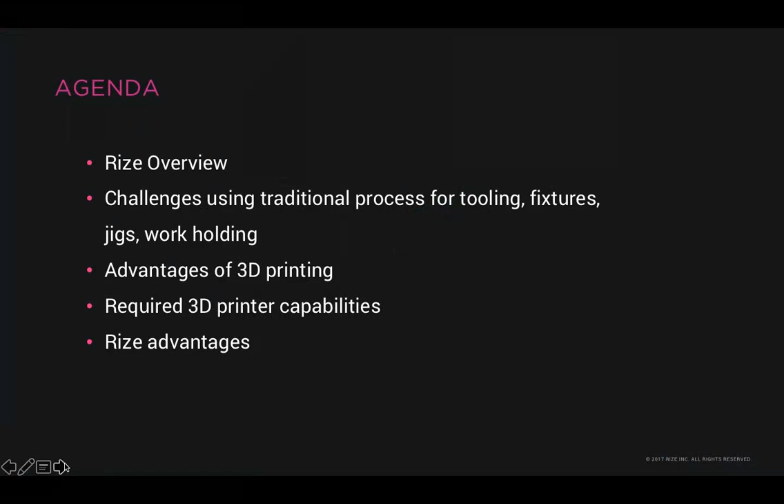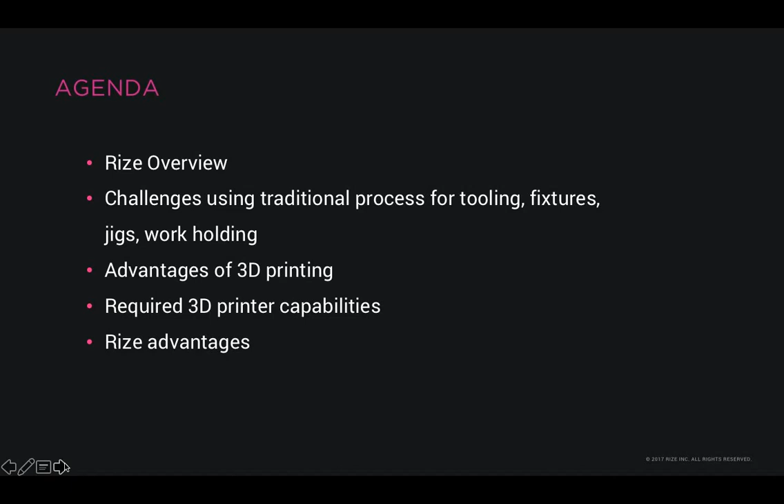First, I'll provide just a brief overview of who we are. Then we'll talk about some common challenges using traditional manufacturing processes to produce tooling. Next, we'll cover the advantages of 3D printing versus traditional processes for many of these applications. Some of you might already be using 3D printing, but this is useful information if you don't use a 3D printer or if you're thinking about implementing 3D printing but don't know that much about it. Then we'll talk about capabilities you need in a 3D printer if you plan to use it for on-demand production of functional parts in the tool room, on the production floor, or in your engineering office. I'll talk about some of Rize's advantages in this area.

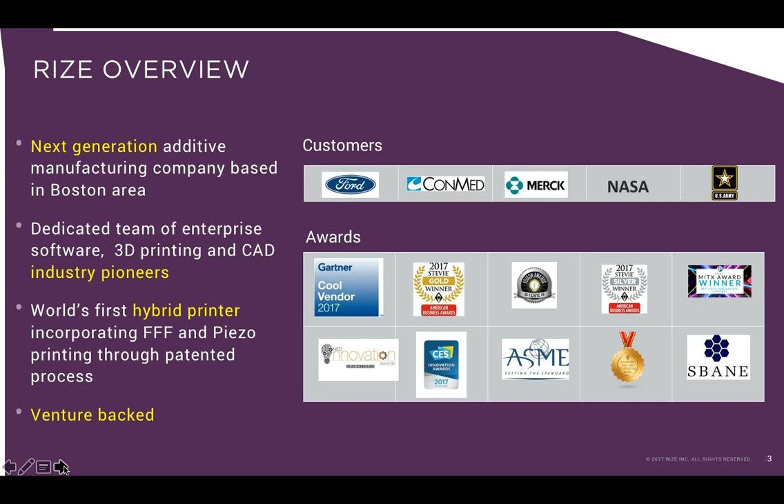First, let me tell you a bit about who we are. We're a 3D printer manufacturer just outside of Boston. Rize was founded by and has a team of 3D printing pioneers with more than 20 3D printing patents to our name, including our APD technology. Rize is venture-backed. Our mission is to enable sustainable and inclusive innovation to achieve additive at scale. This means getting the technology into the hands of more users throughout the enterprise and to an entirely new segment of commercial users who haven't previously used 3D printing or additive manufacturing.

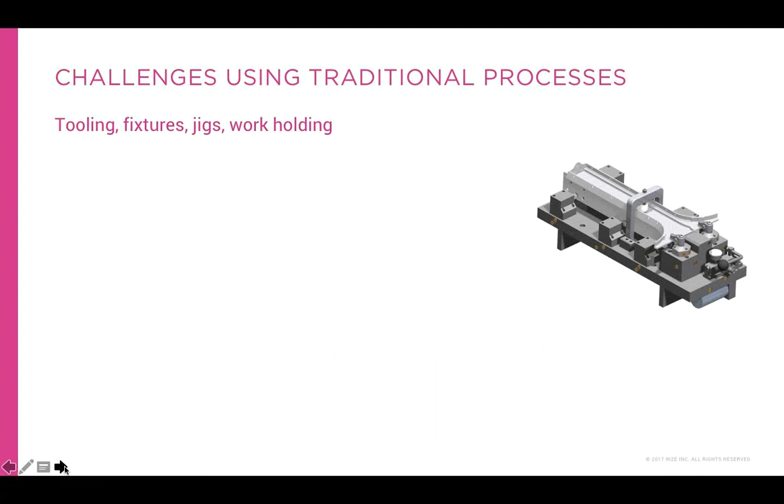So what are some of the challenges you face when manufacturing tooling, fixtures, jigs, and work holding using traditional methods? Well, it's a lot more expensive. I spoke with one customer recently who told me that producing aluminum fixtures and jigs cost about $1,000 per part, and it took several days to weeks to get the part. The same customer also said that whenever he needed a new fixture or jig, he'd have to pull a team member off of another job to make the part. Work holding made using traditional means might not hold the part securely, for example during CMM quality inspections, resulting in inconsistent parts. Your machine tool production time can be taken up manufacturing work holding fixtures.

You want to reduce the number and weight of your parts. Your customers might not understand your digital models and drawings, especially for complex parts, which can ultimately result in your needing to remachine the parts at significant cost and time, and an unhappy customer. You're always looking for ways to make your quoting process more efficient and successful, resulting in increased sales.

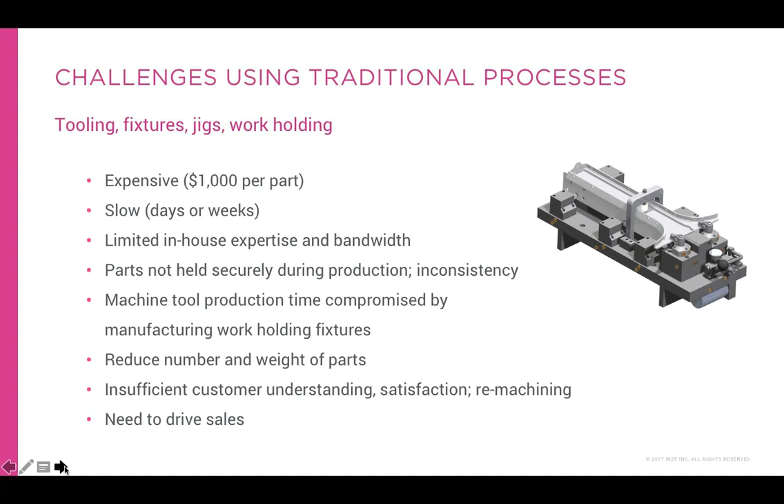3D printing can solve many, if not all, of those challenges. Plastic 3D printed parts are far less expensive than traditional machined parts, and some 3D printers can give you a part in your hand in a day or two. Plastic-based 3D printers can reduce the number of parts in an assembly, as well as the weight of the parts. You can use 3D printed parts to eliminate costly physical inventory by only printing what you need when you need it. Conformal work holding holds the parts more securely, ensuring they're consistent. 3D printing your tooling frees up your machine tools for production instead of producing tooling and work holding.

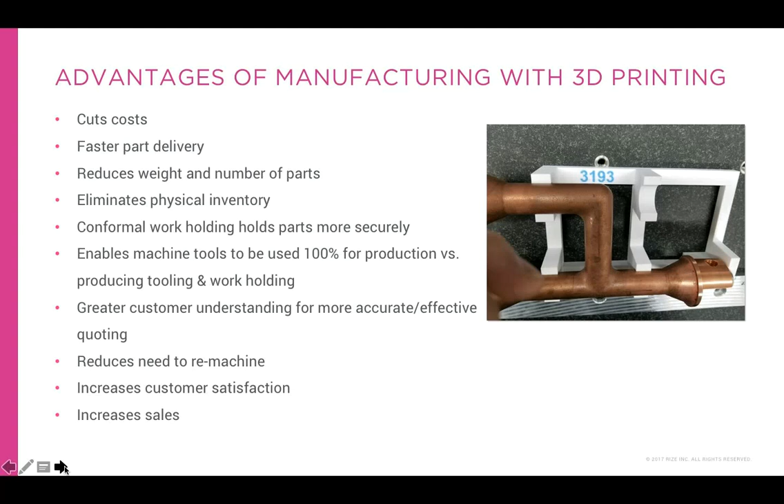On the sales side, 3D printing a scale or full-size version of your customer's part increases both your and their understanding of the end result. So your quoting will be more accurate and you won't have to remachine the part. Your customer will be more satisfied and you'll increase sales.

But, and this is important, not all 3D printers are created equally. You wouldn't use a screwdriver to hammer in a nail, and the same principle applies to 3D printers. You need parts that will perform as well as machine tooling and work holding, so they need to have adequate strength. The printer itself can't be slow, and equally as important, the total end-to-end process of using the printer can't be slow. This includes work that needs to be done to prepare for printing and work that must be done to parts after printing. Another factor here is where the printer needs to be located.

The material properties of the printed part need to interact well with your machinery and metal parts. I mentioned speed before, and ease of use is a component of speed. You don't want to have to hire specialists to run the printer or finish printed parts, and you want to spend more time running the printer and less time fixing it. In short, it needs to be as easy to learn and use as a common appliance.

Just press print and get a part. In order to run the printer in your tool room, office, or on the production floor, it needs to be safe without any VOCs, and the material must also be safe for handling. Equally important is that it can't require any messy or unsafe post-processing or part finishing after printing.

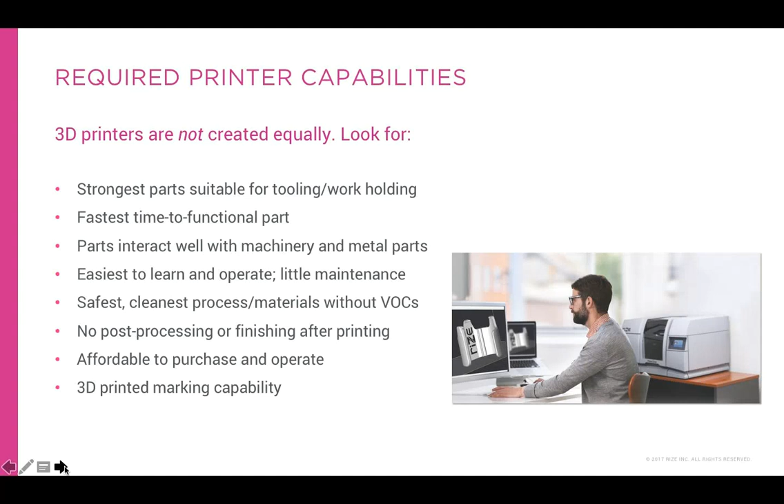It goes without saying that the printer needs to be affordable to purchase and to operate. You should also consider looking for a printer that enables you to 3D print text and images right on the parts for things like part numbers, instructions, and other such applications.

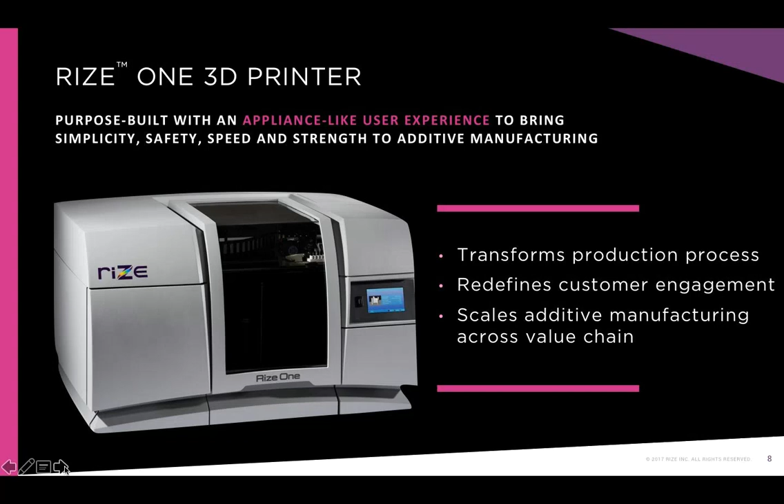So let's talk about the Rize 1 3D printer for a second. We have purpose-built Rize 1 with an appliance-like user experience to bring simplicity, safety, speed, and strength to additive manufacturing. This has never been done before. This enables you to transform your production process, redefine your customer engagement, and scale additive manufacturing across your value chain.

Rize is the first ever hybrid 3D printer combining two totally different technologies into one machine. Our patented augmented polymer deposition, APD, is an inclusive multi-material 3D printing technology. APD combines two discrete technologies, material extrusion and jetting, to simultaneously extrude medical and engineering-grade thermoplastic and jet selective additives at each voxel, or 3D pixel, wherever they're needed to change the characteristic of the material.

Here's how APD works. We extrude the layer of thermoplastic through the proprietary extruder and then modify each layer by jetting special inks or liquids on the surface.

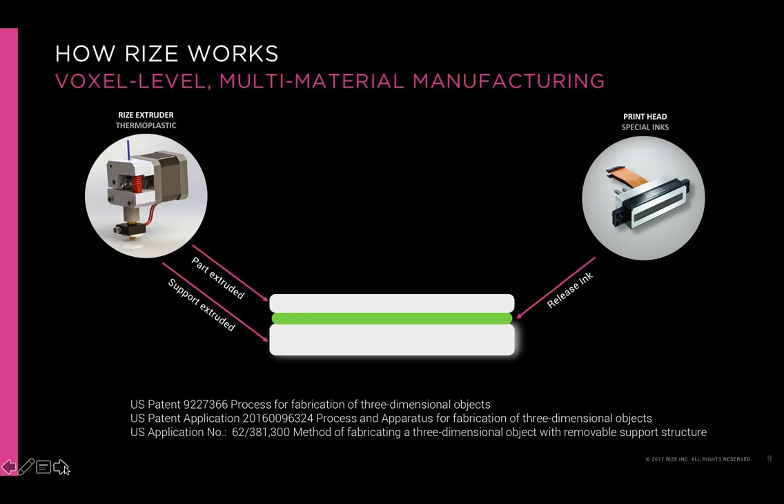So let's have a look. Thermoplastic is extruded, forming the support. Release ink is jetted between the support and the first layer of the part. Then thermoplastic is extruded, forming the part layers. Then special liquids are jetted between the layers of the thermoplastic to change the material properties by voxel. Rize's APD process is patented and is therefore the only 3D printer that can do this.

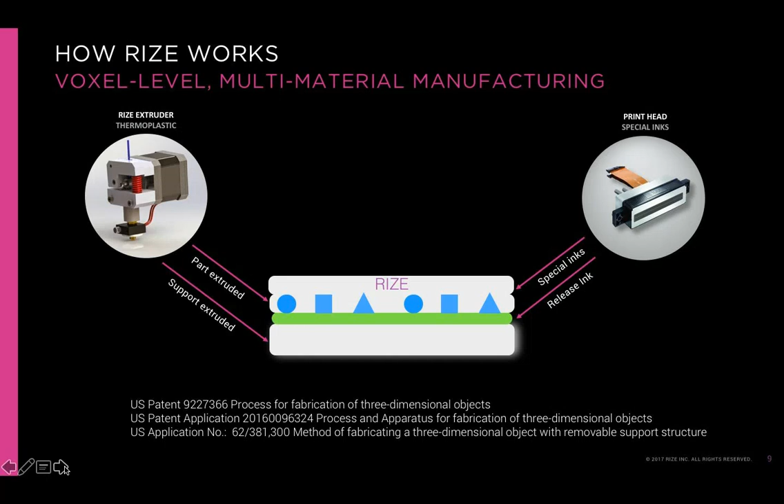Core to our process are our materials. The filament we extrude to form the support and the part is called RIZIUM 1. It's our own compound of engineering and medical grade thermoplastic. The functional inks we are currently jetting are Release 1 and marking ink. Release 1 repels the bond between the part and the support structure. Marking ink is what gives you the ability to 3D print text and images on your parts.

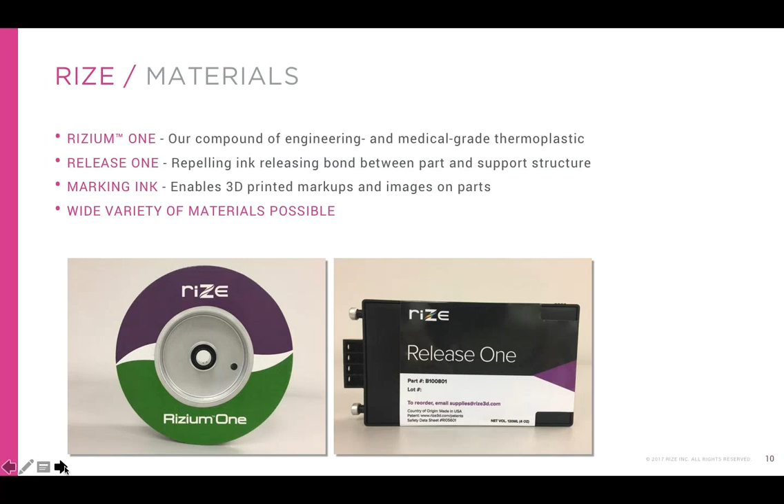Given the unique nature of our hybrid process, a wide variety of materials are possible. Now let's talk about the benefits of Rize's APD technology for additive manufacturing in tool rooms, engineering offices, on the production floor, and out into the field. First, part strength suitable for functional applications.

Rize 1 produces the strongest parts. They're isotropic, meaning that they have uniform strength in the X, Y, and Z axes. This means you don't have to worry about how to orient the part in your printer to produce a part that's strong enough for your application.

Our parts are consistent and accurate. They have an HDT of 99°C. The low rate of water absorption, less than 0.01%, reduces the chance of warping or coolant attack. And the parts are chemically resistant to acid, alcohol, and acetone. In fact, one of our customers uses Rize parts functionally to mix various chemicals.

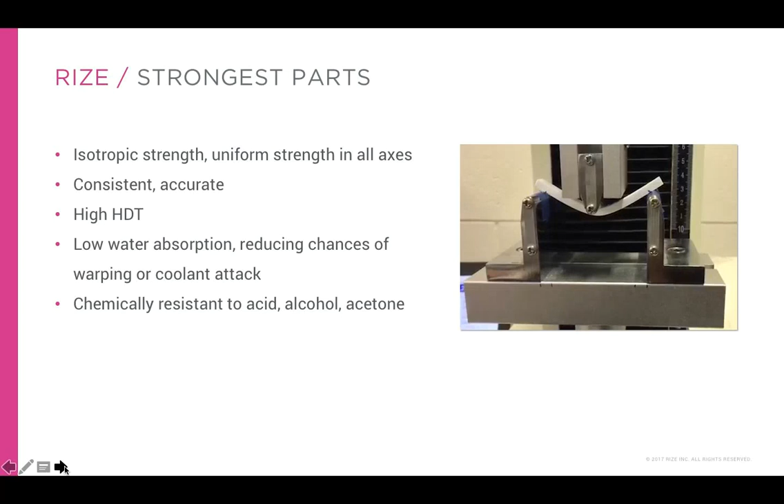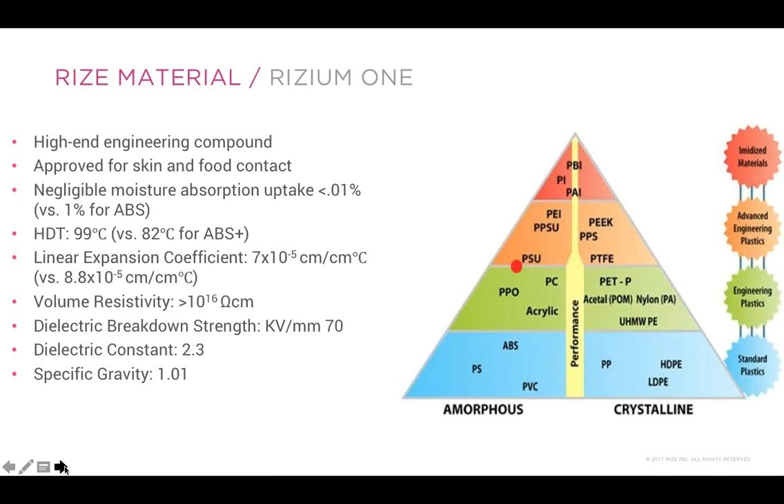RIZIUM 1 is a higher performance compound than traditional ABS or PLA. It has extremely low moisture absorption that allows for consistent output. It's also lower density than most typical plastics. It's compounded from medical grade components.

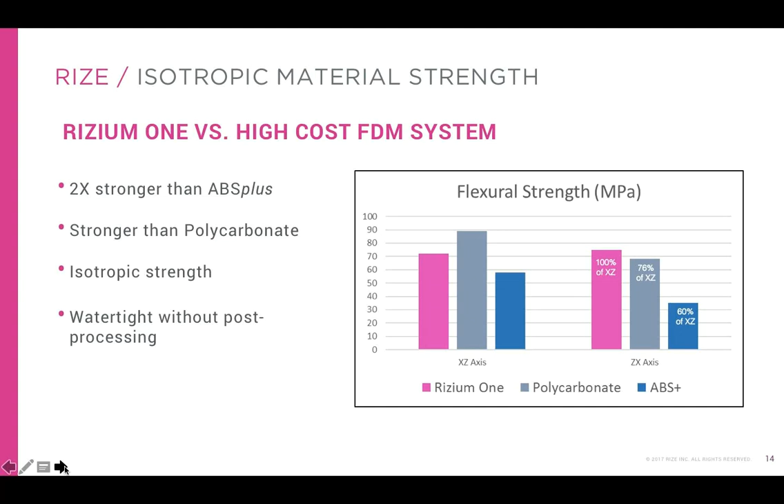Here you can see that our RIZIUM 1 material has uniform mechanical properties in any direction, and how that compares to a costly FDM system.

Isotropic properties are important in additive manufacturing applications because you get a part that really mimics injection molded ABS part performance. You're able to conduct accurate tests to optimize your designs. You can save a lot of time and money on tooling produced with traditional manufacturing methods. And it enables you to build a custom and replacement part on demand wherever you need it.

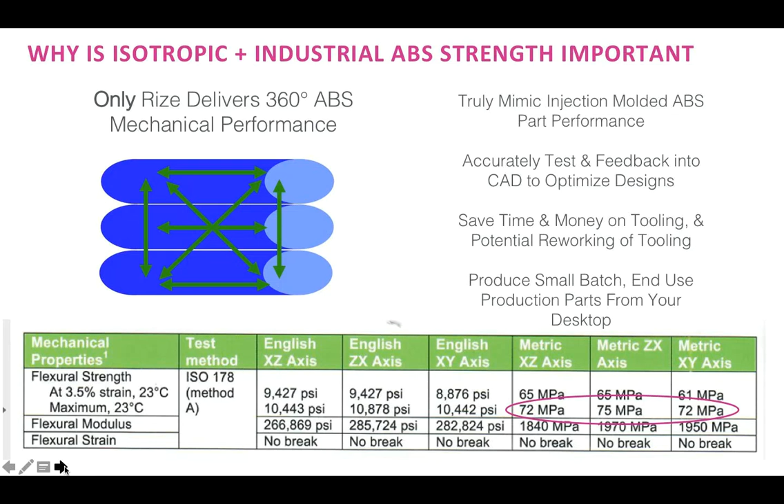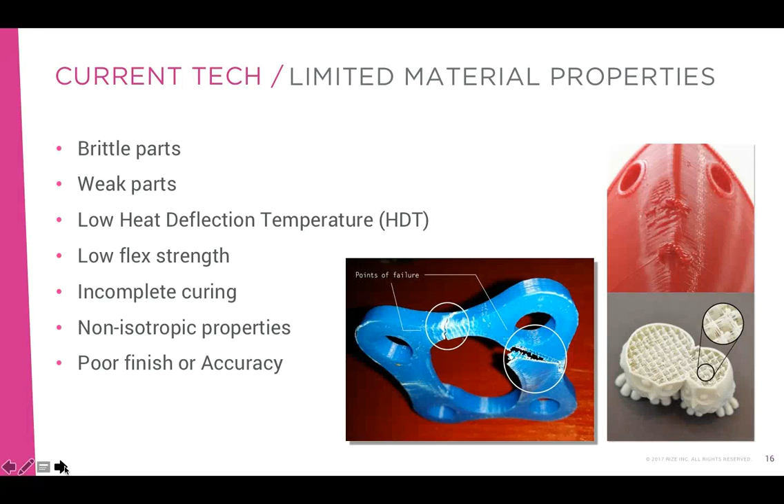This shows the problem with 3D printed items when it comes to functional use applications: brittleness, weakness, low HDT, low flex strength, incomplete curing, non-isotropic properties, poor finish, and little accuracy.

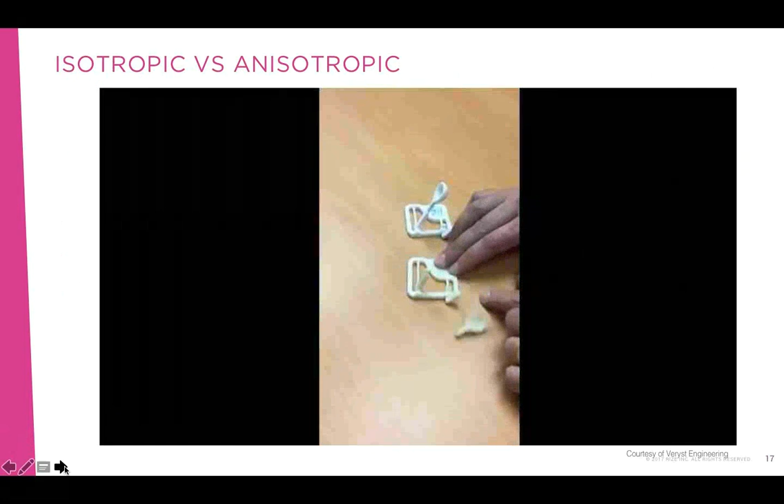This video really drives home that point. See what happens with the first catapult produced on an FDM printer, and the second catapult produced on a Rize One 3D printer.

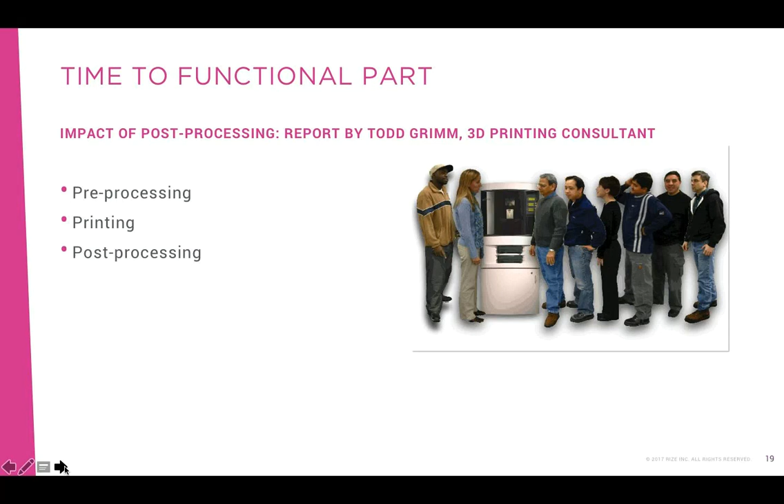The next consideration is speed. Print speed alone isn't important. What is important is the total time it takes to get a functional part in your hand. This total time to functional part involves pre-processing, printing, and post-processing or finishing parts.

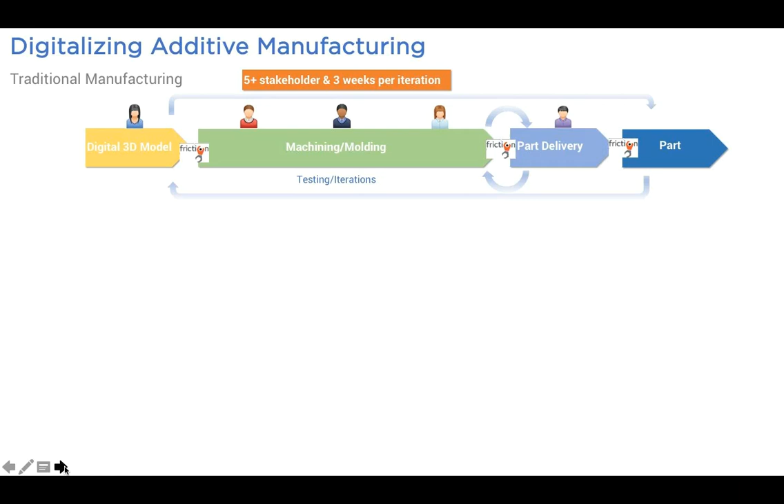This graphic captures the time-to-functional-part difference between Rize and traditional manufacturing methods, and Rize and other 3D printing technologies. You can see here that traditional manufacturing methods have several stakeholders to get to the final part.

When you are iterating, that means 5 stakeholders and 3 weeks per iteration, with lots of friction between each handoff. This improves a bit with 3D printing with today's technology. You still have handoffs at each step, but fewer steps. So for each iteration, you might have a few less stakeholders for a handoff, maybe a little more than 2 days to 2 weeks per iteration.

Now let's have a look at Rize's additive manufacturing process. Now we have one stakeholder, no friction between the steps because there's no handoff. It's largely automated, so for each iteration, it's only one stakeholder and 1 day. This means Rize is 50% faster for a third of the cost versus other 3D printers.

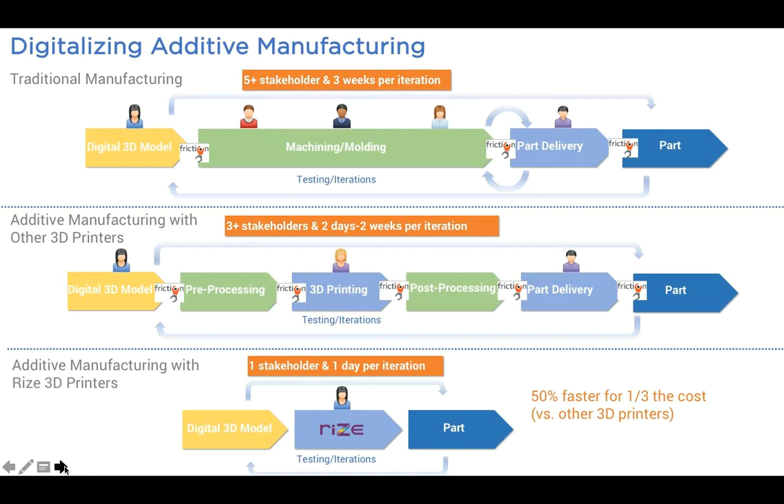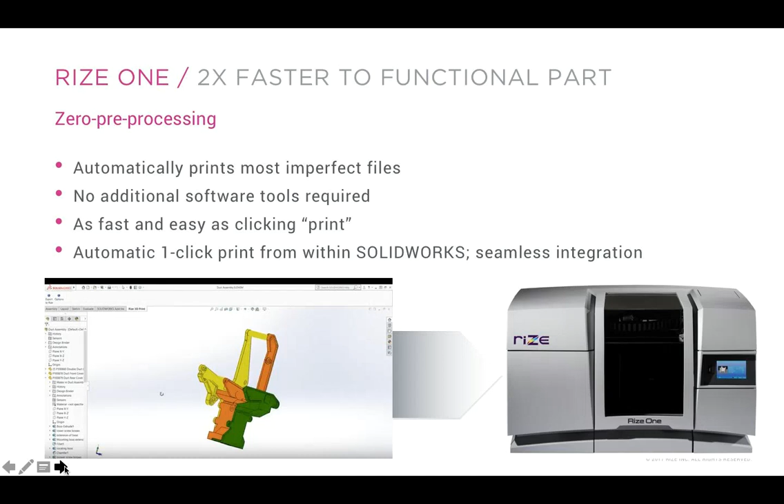In terms of pre-processing, our Rize software automatically prints most imperfect files, so no additional software tools are needed for file fixing in order to make the file printable. It's as fast and easy as clicking print. In fact, SOLIDWORKS users can print directly to Rize One with one click from within SOLIDWORKS software.

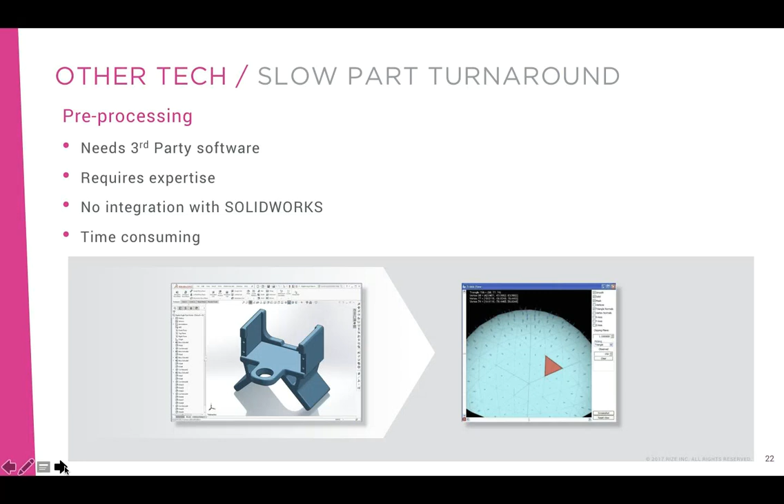On the front end, users are often faced with purchasing and using additional complex software tools to design and make a file 3D printable. That can be tedious, time-consuming, and difficult. As a result, many engineers purchase file fixing software in addition to their CAD software to alleviate this headache. But even those programs require additional time and expertise in order to get a 3D printable file. Rize solves this with our own build prep software that can accept most file formats.

In addition to pre-processing, what many people don't know is that with 3D printers, there's a lot of work users need to do after a part is 3D printed before that part is usable. In a study done by 3D printing and additive manufacturing industry expert Todd Grimm, he detailed the impact of post-processing after 3D printing. He reported that it's a non-value-added operation that increases overhead, complicates the workflow, adds expense and time, and for the 3D printing lab, it's undesirable.

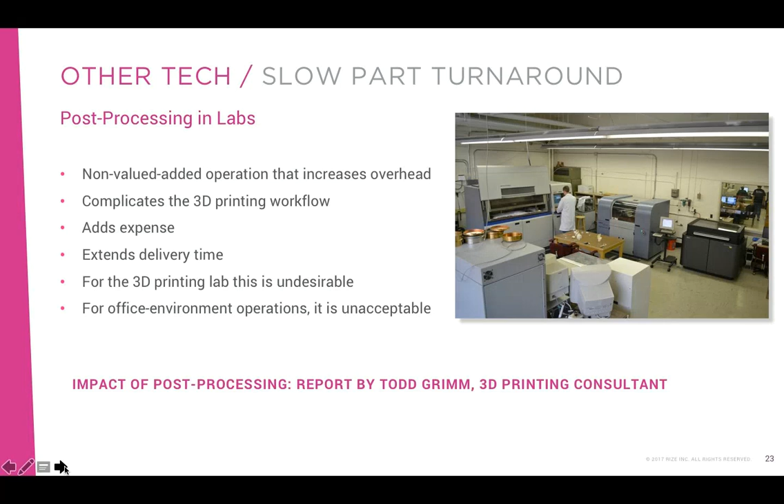But if you're going to 3D print in an office environment, it's absolutely unacceptable. In his report, Todd spoke with a number of commercial users and discovered that in FDM processes, post-processing involves breakaway supports that, when broken away from the part, damage the part. It's very labor-intensive and tedious. Light sanding is also required to remove the remnants of the supports on the parts.

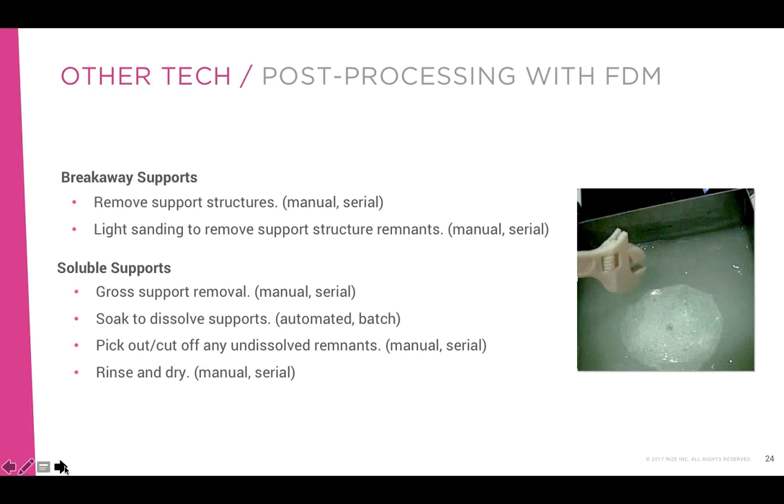In their soluble support process, parts need to be soaked in a corrosive agitated bath, followed by removing the support remnants from the part, rinsing, and drying. Our customers tell us that with other technology, they have to wait up to 12 hours for their models to be post-processed. This usually means a full extra day for the part to be ready to use.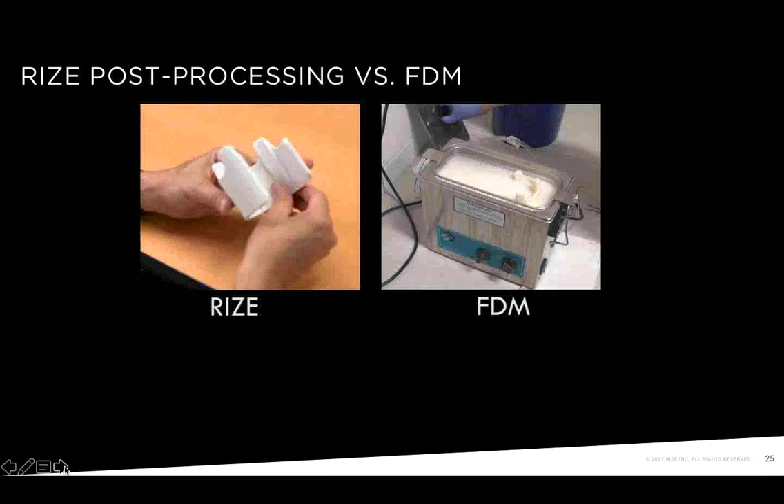Here's a comparison of our process of support removal versus that of the FDM process. The same part took 25 seconds with our technology versus 3 hours with FDM.

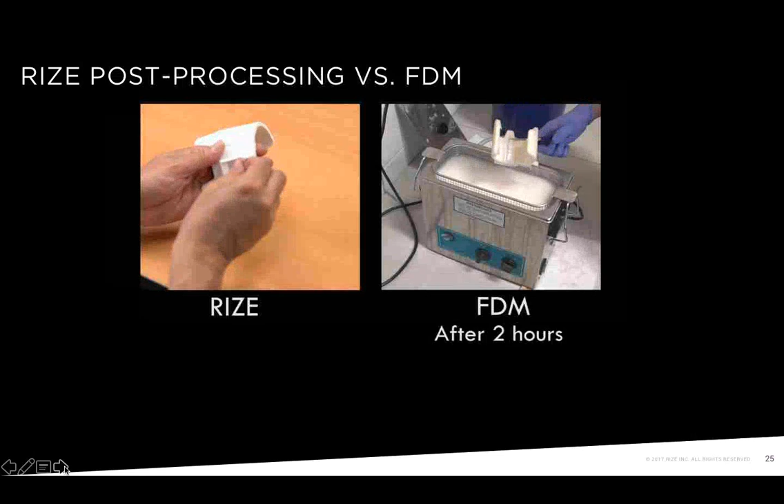We can cut time to a functional part in your hand by 50%, cut costs, and eliminate the need for materials, equipment, facilities, and mess that have been obstacles to expanding use of desktop machines outside of dedicated lab environments.

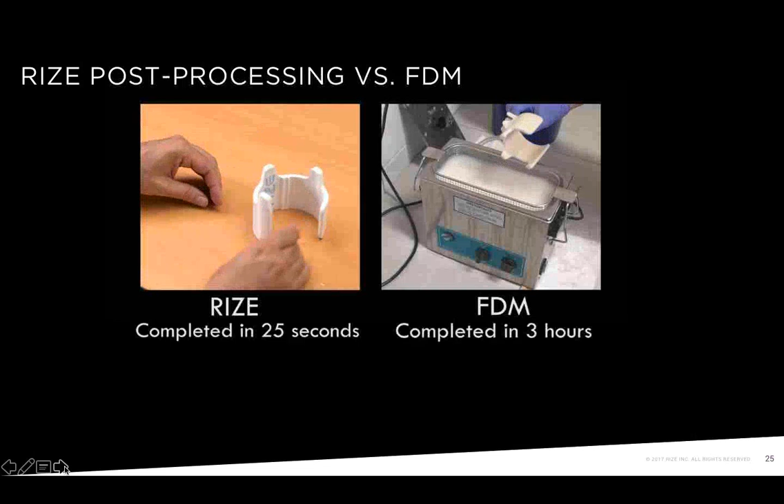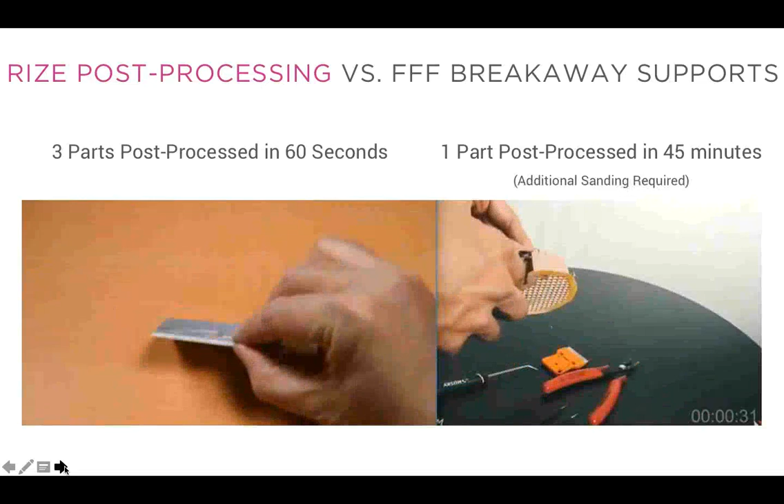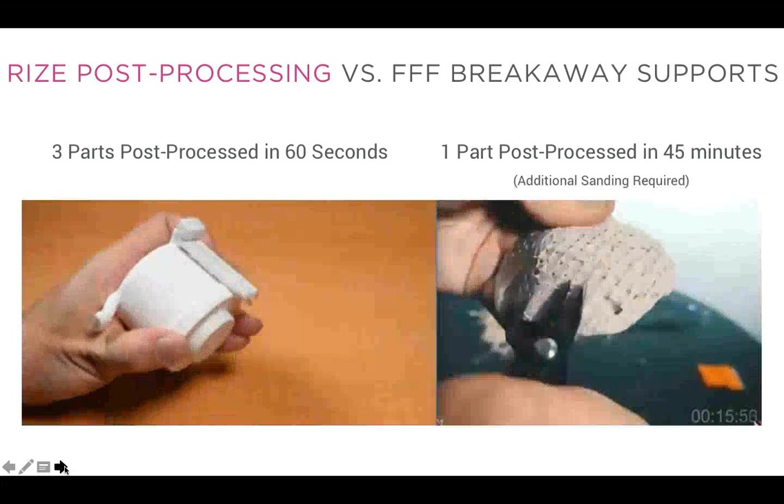Here's an example on the right of the breakaway method I mentioned. It took 45 minutes, not including sanding, that was needed after the supports were removed, compared to just 60 seconds for Rize support removal. You can see here that we're removing supports from several parts in less time than it took to remove the supports from one part with their breakaway process.

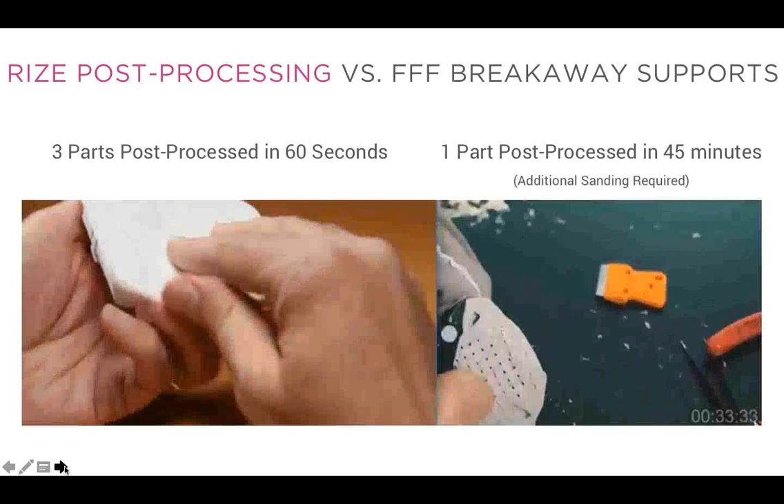Another characteristic of post-processing that Todd uncovered is the safety and environmental component. Most 3D printers require potentially hazardous or messy post-processing techniques. This means the technology must be located in specially equipped labs, separated from the engineers and others who need the parts.

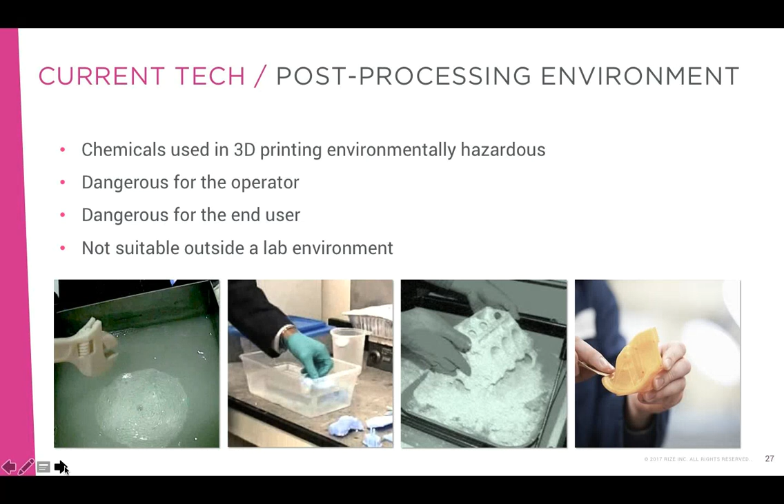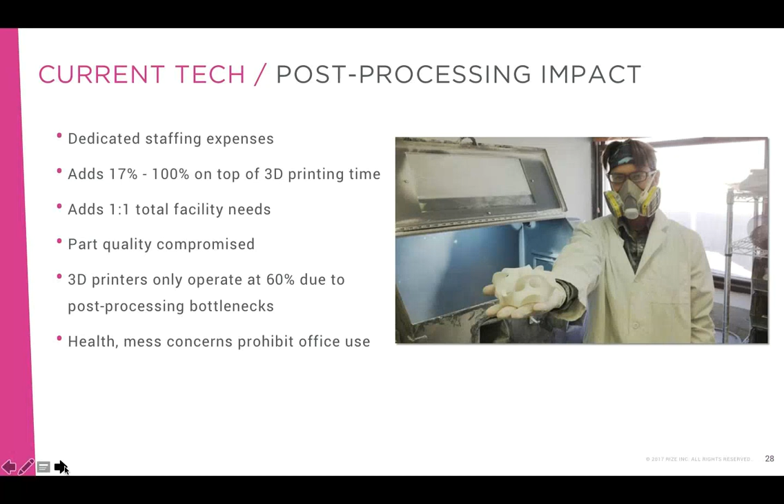As a company increases its use of additive manufacturing and 3D printing, it can become a huge cost if the wrong equipment is purchased, and some companies hire people just to post-process parts. An important consideration for you is also what it takes to learn, use, and maintain the printer.

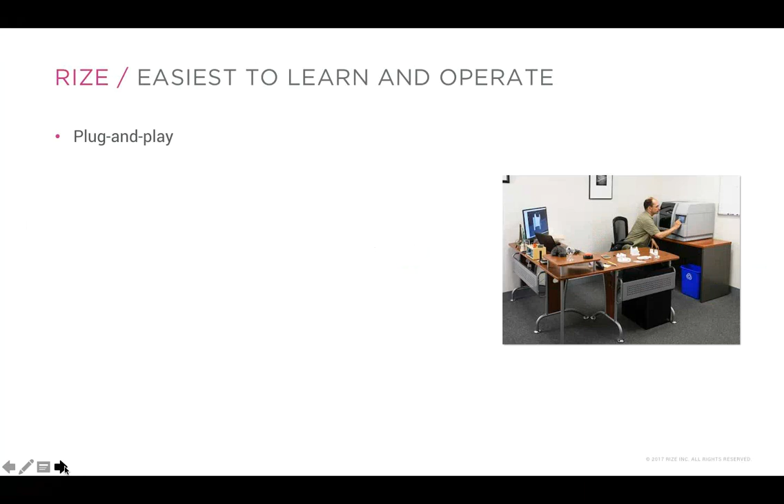Rize is without question the easiest industrial 3D printer to learn, use, and maintain. We designed it to be as easy to use as a document printer, so anyone on your existing team can get up and running and use it on a daily basis with minimal training, regardless of whether or not they've ever used a 3D printer. We provide one-click printing and no post-processing. Also important is that Rize 1 is highly reliable with very minimal maintenance, especially compared to other industrial 3D printers.

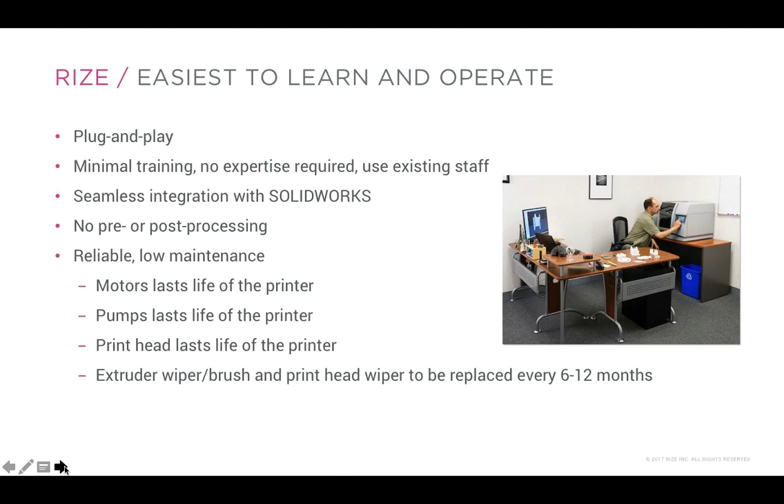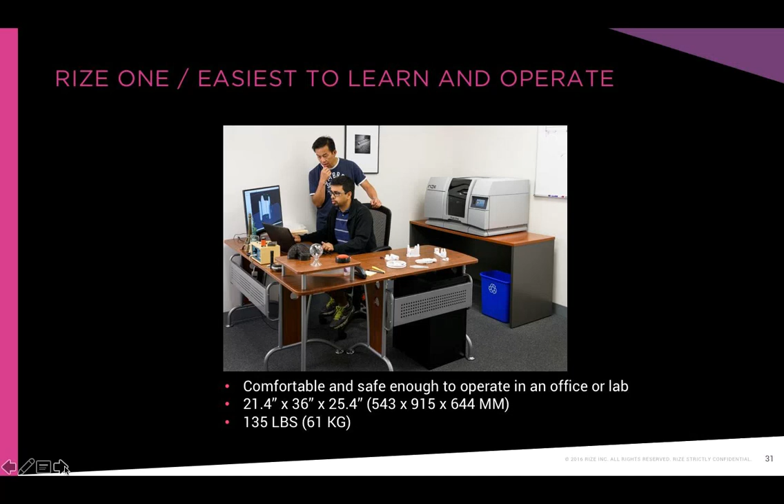Its size and the fact that it emits no VOCs, uses only safe materials, and doesn't involve any messy or chemical post-processing means you can operate it on demand at the point of consumption, in your engineering office, in your tool room, on the production floor, or out in the field. It includes some nice usability features, such as a graphical touchscreen for ease of use wherever the printer is located, automatic filament hot swap so you won't run out over the weekend or during a long build, and so you won't have excess inventory of filament sitting on your shelf. The extruder is self-maintaining, so no need to worry about blocked nozzles. The heads are also self-maintaining to ensure the printer is always ready to be used and will deliver consistent, great quality.

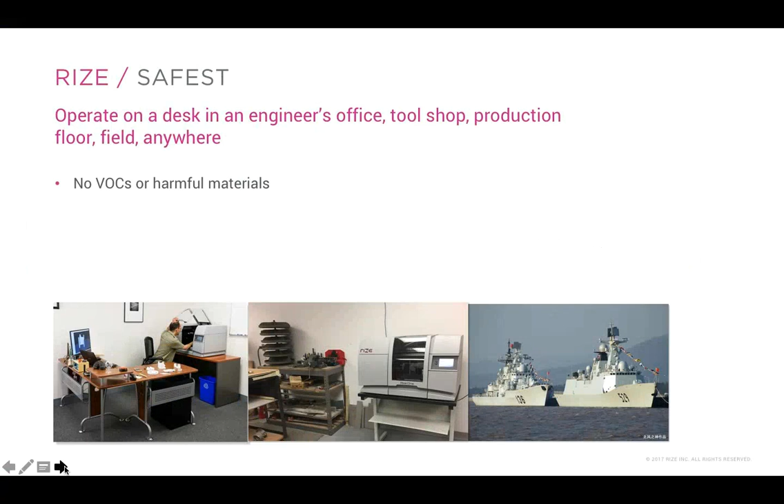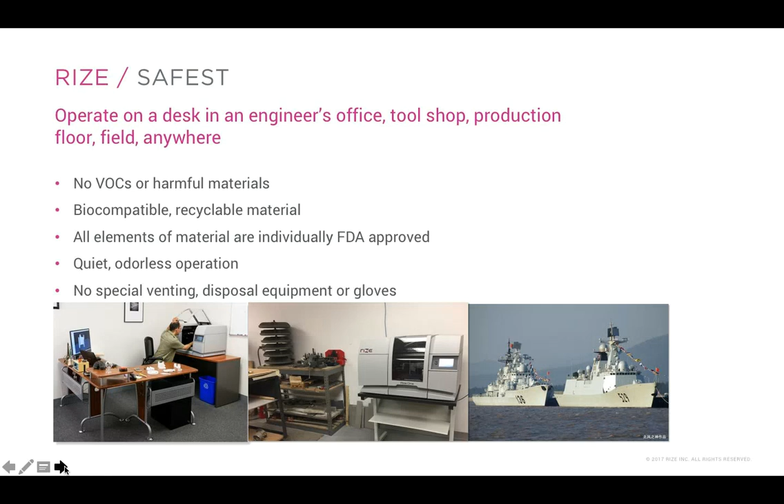Safety for you, your employees, and your customers is another important consideration of additive manufacturing. Rize is without question the safest 3D printer on the market. What this means is that you can operate it right in an engineer's office, in your tool room, on the production floor, or out in the field without having to worry about special venting, storage, or disposal systems. Unlike virtually every other 3D printer, Rize has no VOCs or harmful materials involved in the entire process. Our materials are recyclable and biocompatible. All of the components that make up our material are FDA approved. The printer is quiet and odorless.

The Illinois Institute of Technology conducted a study showing the hazardous emissions from most 3D printers, such as styrenes, lactides, and more. This is something that most people are not aware of.

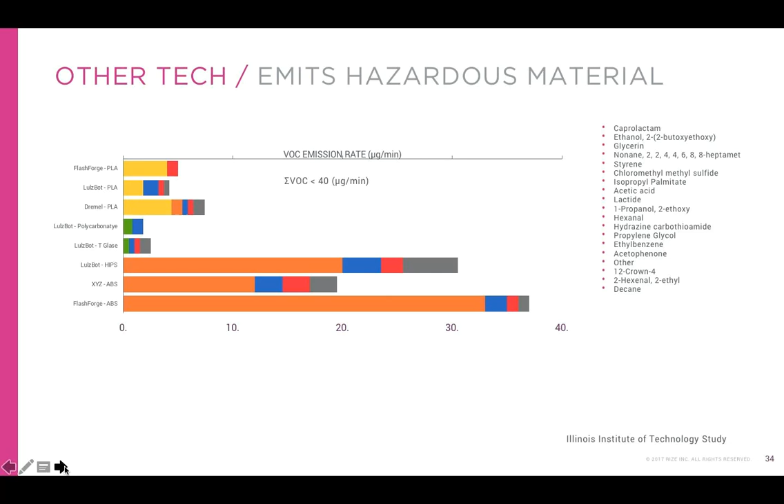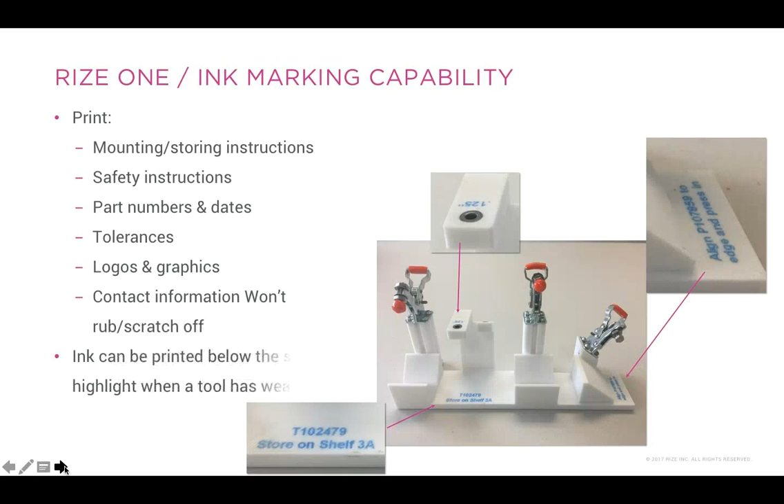Now let's talk about ink marking capability. 3D printed ink marking means that you can actually 3D print detailed text and images right on your part as part of the printing process. And the ink is inside the part so it won't wear or scratch off. Rize 1 is the only 3D printer that can produce ink marking on a functional end-use part. This capability has wide application. You can print mounting or storing instructions on the part, safety instructions, part numbers and dates, tolerances, logos, graphics, and contact information that won't rub or scratch off.

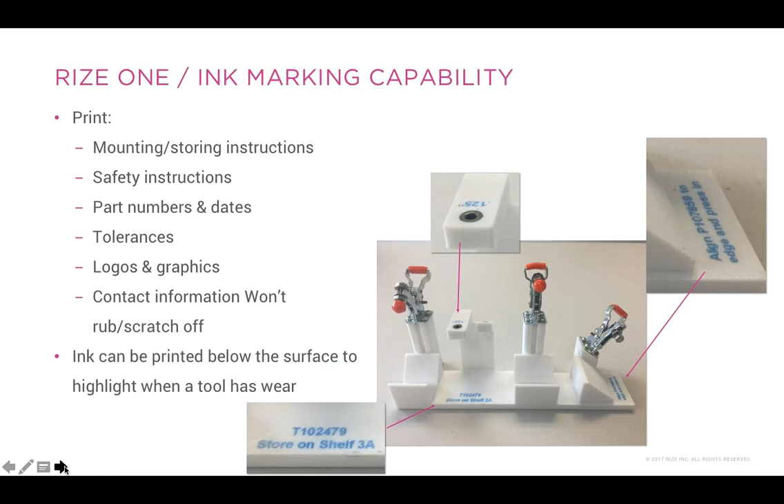The ink can be printed below the surface to highlight when a tool has wear. You can even print digitally augmented parts, a secure QR code, for example, and when you scan the QR code on the part with your smartphone, it'll bring up all sorts of information about the part or tie into whatever system you require. The ink marking feature can be used in engineering, medical, product design, and sales and marketing applications.

Everyone's concerned about keeping costs down, especially small to mid-sized companies. Cost is more than the initial purchase price of the printer. Operational costs have to be considered. Rize is the most affordable industrial class 3D printer. Not only is the initial purchase price of Rize 1 a fraction of the cost of comparable systems, our operational costs are half the cost of other technologies.

With Rize, you don't incur all of the hidden costs associated with post-processing that are required with other technologies. And certainly, time is money, so getting a part 2 times faster with Rize will cut costs. Rize 1 can also replace your costly physical inventory with digital inventory, save labor costs, and reduce costly machining errors.

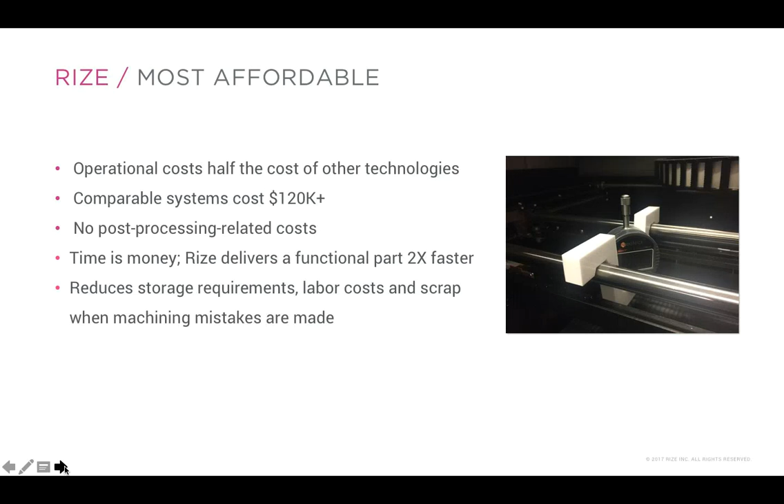Consider this. A CNC machine tool and programmer costs around $200 an hour. They spend 5 hours a week making one piece of work holding. That's $52,000 a year. Rize 1 costs $35,000 all in. And if you add $5,000 worth of materials, you've just justified your ROI within 9 months.

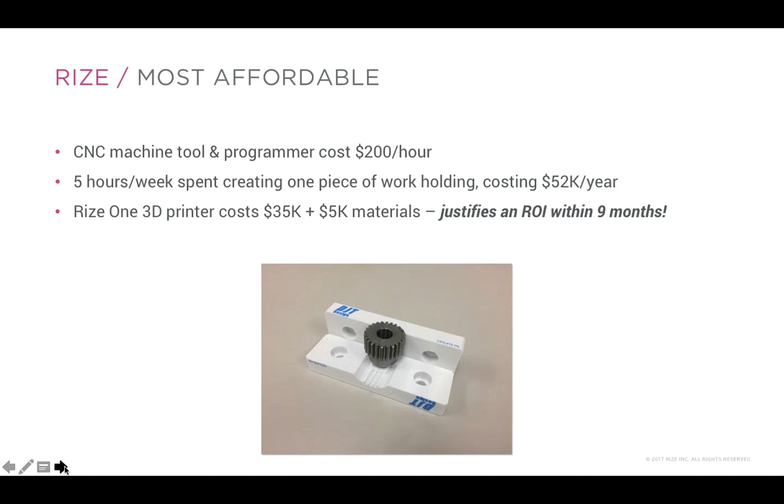I just want to share with you 2 relevant customer stories. You can see additional case studies on our website if you're interested in learning more.

HMS Industries, manufacturer of custom metal stamping and industrial tooling, based in Blairsville, PA. They provide high-quality manufacturing services including product and prototype development, EDM tool design, tool and die manufacturing, as well as high-volume stampings and CNC machining to manufacturers across all industries.

They selected Rize 1 to produce functional jigs and fixtures for holding parts in machines during CMM quality inspections. HMS cited Rize's unique zero post-processing, isotropic part strength, ease of use, and low cost for the purchase of their first 3D printer, enabling on-demand production of custom and replacement jigs and fixtures at the point of consumption in the company's tool and die shop.

Priding themselves on strict quality control standards, they needed a fast and affordable way to produce in their tool shop strong jigs and fixtures that can secure parts during production to ensure that the parts they manufacture are consistent. Previously, they built jigs and fixtures from aluminum, each costing as much as $1,000. This required a specially trained team member to be taken off another job to produce the part.

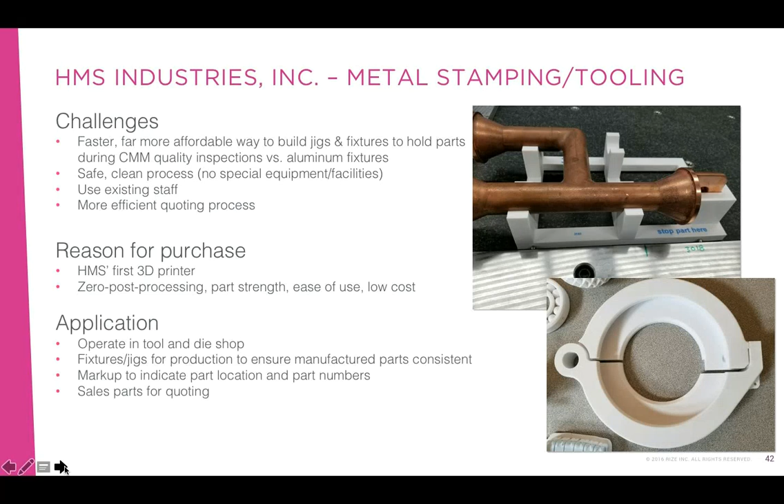With their Rize 1 3D printer, HMS employees design and print parts on demand in their tool shop in one day, freeing up a team member and saving up to 2 days per part, per fixture, versus producing aluminum fixtures, and only costing about $40 a part.

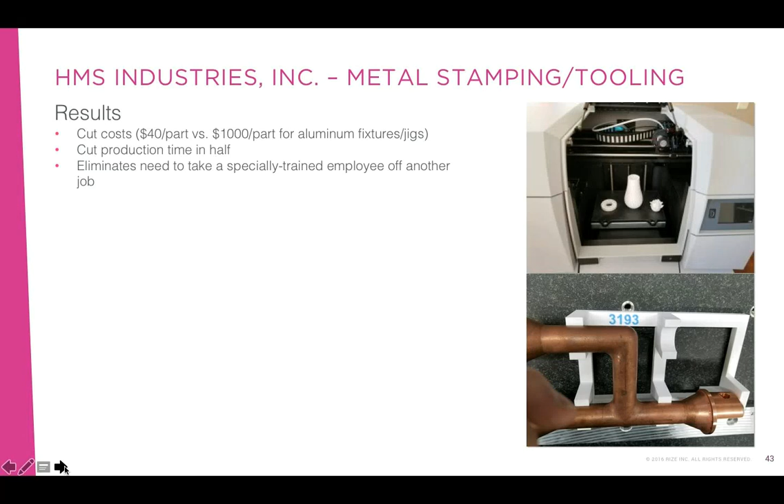Rize's safe and sustainable biocompatible materials and process, without any VOCs or post-processing, enables the team to operate Rize 1 in their tool shop without the need for any special ventilation, storage, or disposal equipment.

They also use our breakthrough 3D printing marking capability to indicate right on the part the location where the part number should be placed, and part numbers for identification.

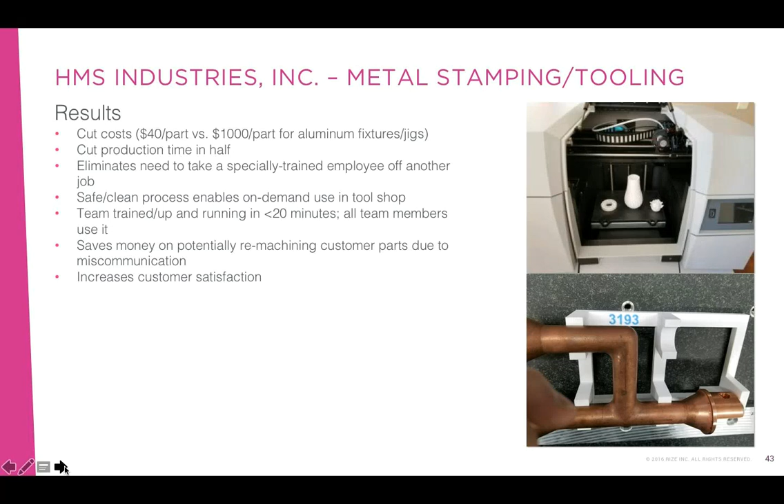The team was able to learn how to use Rize 1 and be up and running in less than 20 minutes. Noting that a digital model can't tell the whole story, the HMS team also prints complex parts to assist in the quoting process before machining the parts. This avoids the additional time and high cost of potentially having to remachine the parts, and increases customer satisfaction.

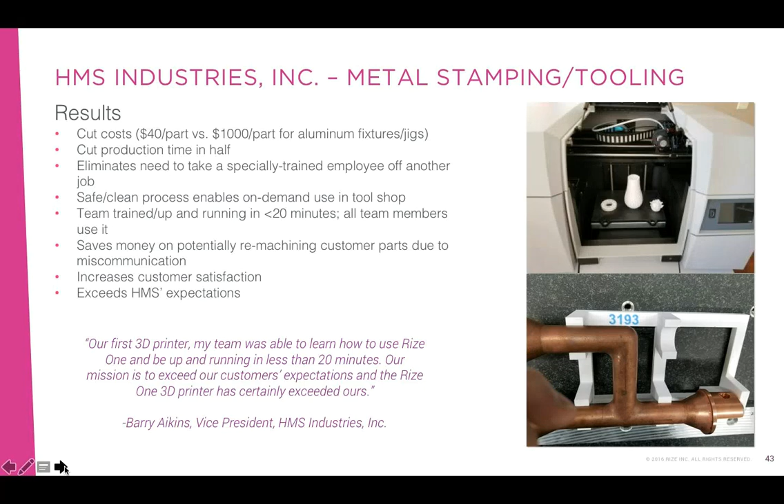In short, Rize 1 has exceeded HMS's expectations.

Now we'll turn to ThermoFab.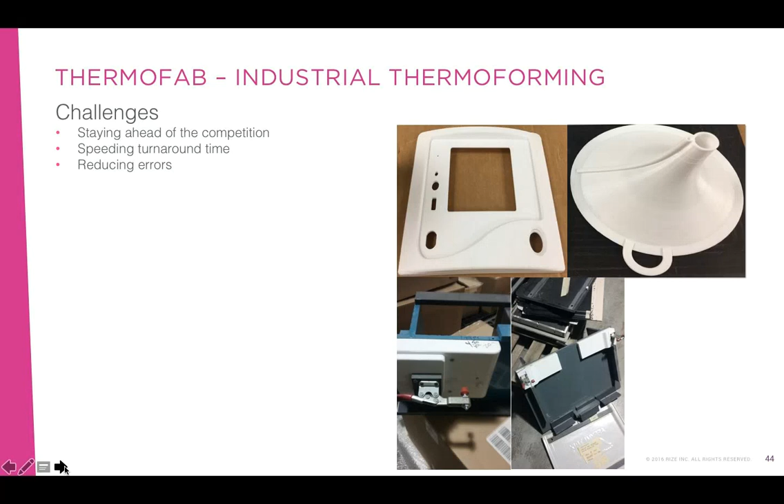Since 1976, ThermoFab has distinguished themselves for delivering unparalleled thermoforming quality, accuracy, superior service, and an astonishingly fast 4 to 6 week turnaround for companies seeking custom plastic enclosures in small quantities. They're focused primarily on the medical, industrial, computer, and armed services markets.

ThermoFab has an impressive portfolio of clients such as L3, Mako Surgical, Locus Robotics, Cisco Starry, Transmedics, Biotech, and many more. Their President, Tom King, believes in leading, not following. This innovative philosophy drove his interest in adopting 3D printing at ThermoFab.

After observing 3D printing for a year and carefully evaluating Stratasys and Rize 3D printers, he purchased a Rize 1 3D printer due to its unique ease and speed of support removal without solvents following 3D printing.

They used their Rize 3D printer to produce fixtures for setting up production rather than using blocks of CNC machined aluminum. He said they produced low volumes of enclosures for high-end equipment, producing 5 to 10 or up to hundreds of parts per month, and they have to be right. Producing aluminum blocks just took too long.

ThermoFab's engineers also use Rize 1 to produce prototypes of small thermoformed parts such as faceplate backings, housings, and more, for form and functional testing before manufacturing the final product.

Using Rize 1 instead of CNC machining to manufacture fixtures is speeding their process at a lower cost. 3D printing saves them time by eliminating tooling errors. It's also reducing errors before expensive tooling is cut.

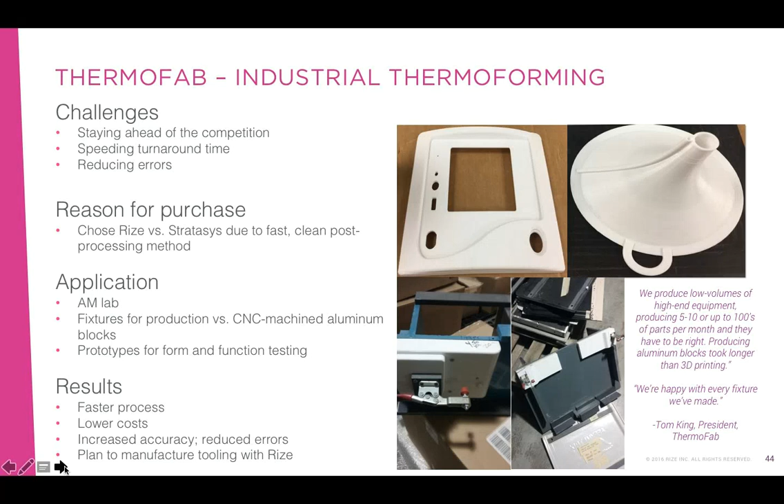Always innovating, they also produce experimental parts on the Rize 3D printer, testing the possibilities to continue to improve their process and expand their services. For example, they plan to use Rize 1 technology to manufacture tooling. According to Tom, the more you play, the more you learn, and the more you learn, the better you get at it.

Before we wrap up, I'd like to summarize the advantages of using Rize 1 for additive manufacturing in your tool room, office, or on the production floor.

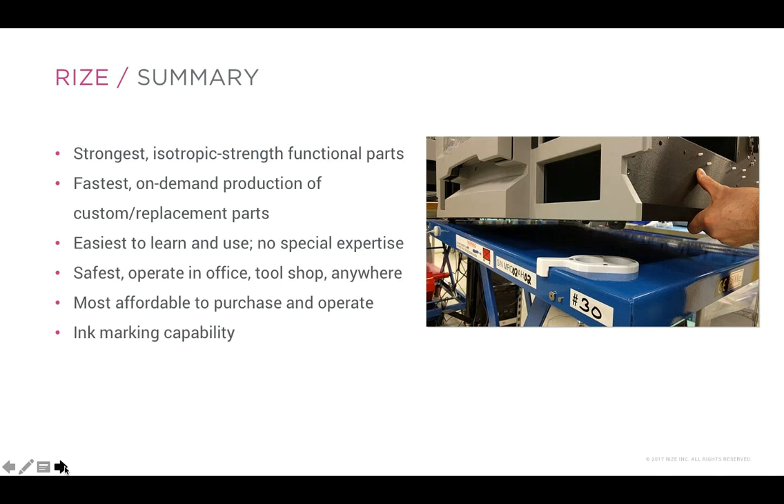Rize offers the strongest isotropic strength functional parts, the fastest on-demand production of custom replacement parts, the easiest to learn and use 3D printer - no special expertise is required. It's the safest to operate in any office, tool shop, or virtually anywhere. It's the most affordable to purchase and operate. And it provides the only ink marking capability on a functional end-use part.

Rize 1 is ideal for producing welding fixtures, soldering fixtures, CMM measurement fixtures, product assembly jigs for pipe and tube manufacture, precision bench fitting operations, and drilling, reaming, and tapping, for example.

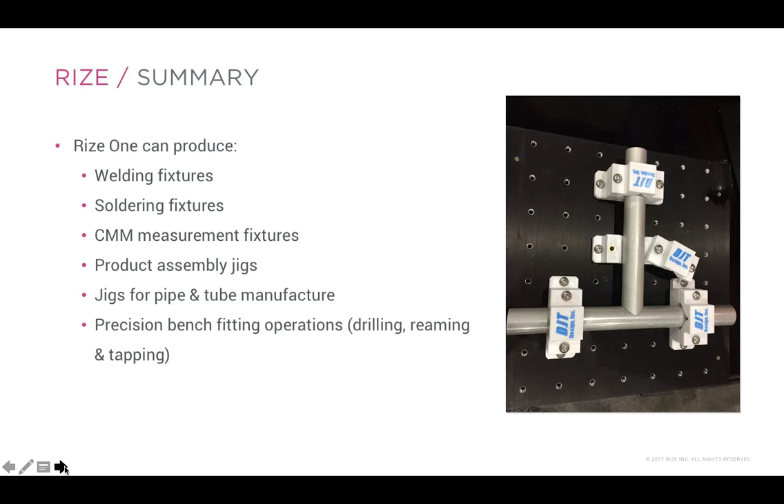Rize is the logical choice for your additive manufacturing needs.